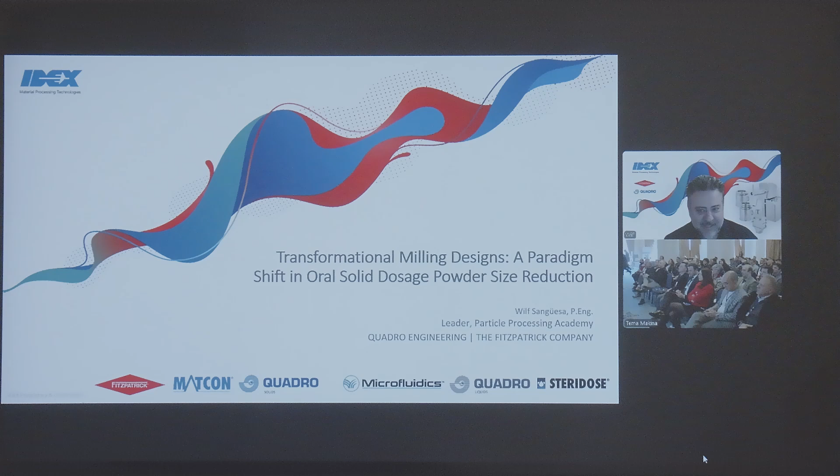But I am glad that we're able to share the next few minutes together and talk a little bit more about some of the things that Quadro and Fitzpatrick have been doing over the last few years. We're going to talk about technology, but before that, a quick introduction of who I am. I've been with Quadro since 2005, so almost 20 years in March.

I know what everybody's thinking - I must have been 14 when I started, because obviously 20 years have gone by. I've had a few roles over the years, mostly in product management, and then more recently toward the application side of the business, supporting customer applications. Right now our new venture is to develop an internal academy to take all the knowledge from those years and train our internal and external partners on our technologies and how we can improve our customers' day-to-day activities.

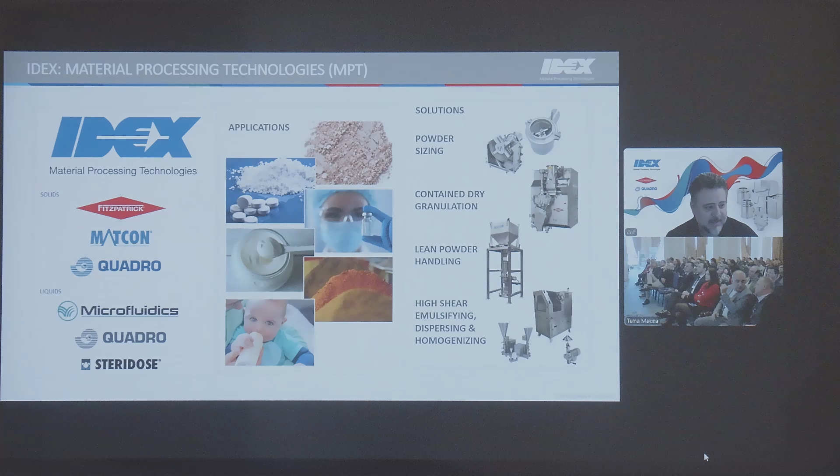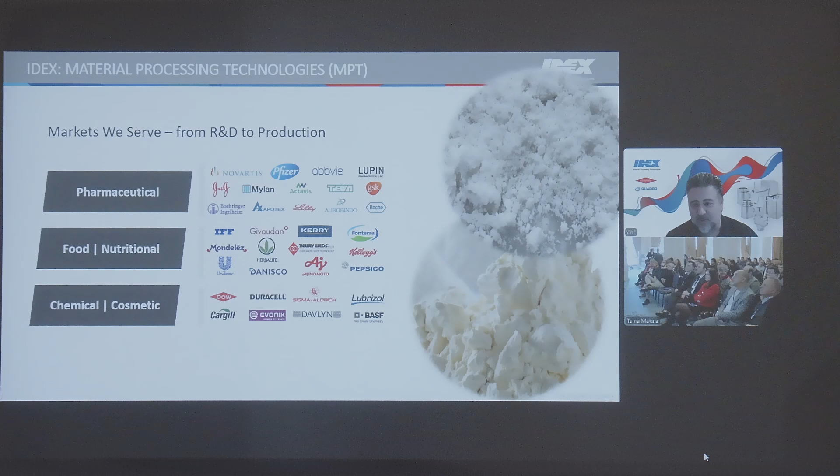Quadro is part of a bigger organization called IDEX Corporation. Within that group, there is a smaller subset of companies that are all related to each other because we manage the same type of applications - Matcon, Fitzpatrick, Microfluidics, and Steridose. We work with just about every customer in the world in the pharmaceutical, food, nutraceutical, chemical, and cosmetic industries.

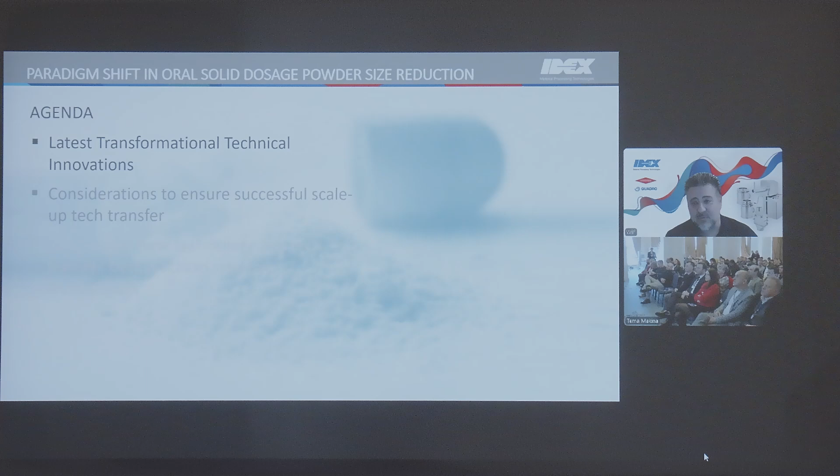So today we're going to talk about some of the things that Quadro and Fitzpatrick have been doing over the last little while - some changes, improvements, and new developments which have been really exciting for us. Since 2016, we've been sequentially introducing new products and improvements to existing products. We'll touch on a few of those this morning, for those who aren't aware of what we've been working on - I think this will be fairly interesting.

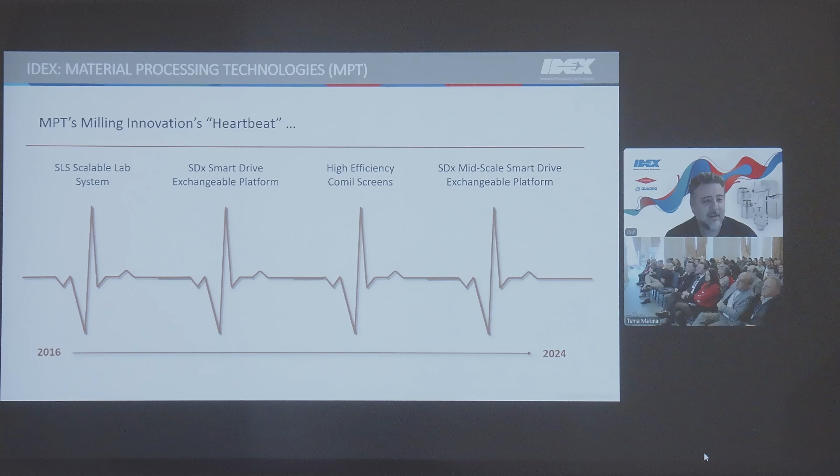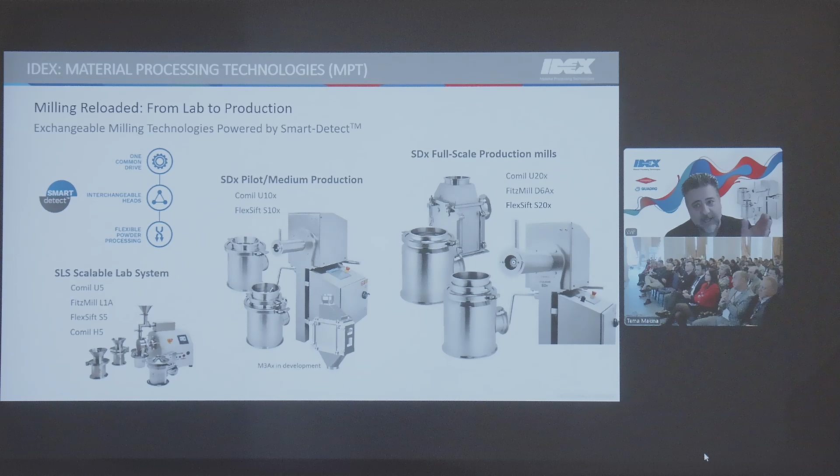We started this interchangeable technology in 2016 with our product lines, and we've been adding to the portfolio by switching all our production machines to that same technology. This is really good because you can take a single drive, and if you need a finer milling application, you put a Fitz mill head on it. If you need a coarser application, you put a Comil head on it. If you need to do security screening, you can put a FlexSift head on it. This goes from the lab all the way up to production scale.

Within that new technology, or this new package, we've made a lot of changes to our actual machines themselves. One thing we used to do is when somebody wanted a machine that was clean-in-place, not wash-in-place - because for us, wash-in-place means you have nozzles that spray inside and get everything wet. It may clean most things out, but clean-in-place means you can clean, you can dry, and then run your next batch without opening the mill. That's what clean-in-place means to us.

So we've made some changes to our clean-in-place technology to make it a lot more versatile and flexible for our customers.

Another big change, and I'll talk in a little bit more detail in the next couple of slides, is we've gone to a greaseless gearbox. We've introduced a complete new design of screens for dry milling. And we've made all our housings, except for the Fitz mill, to be PSR rated, so we've made that sort of standard across both the Comil and the flex sift.

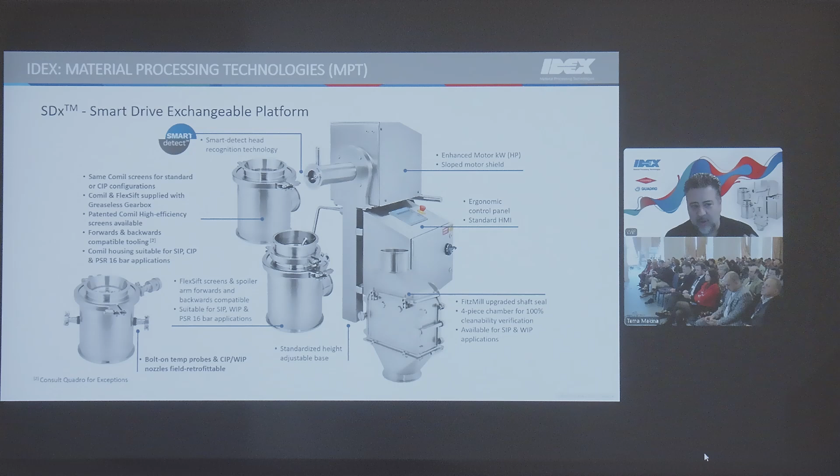So what does that mean as far as, for example, the clean-in-place? I just finished catching the previous presenter talking about OEB bands and OEL levels. With our mills, we have always had the ability to have under 1 microgram per cubic meter OEL level, usually OEB5. It's something our mills can do as standard. We actually have some SMEPAC tests where we are down into the nanograms, like 50, 100 nanograms on average with our mills, but our standard is just under 1 microgram per cubic meter.

And now if you look at the bottom left image, we have transferred those two O-rings to the housing and to the infeed chute. So what this does is, previously, if a customer wanted to have a clean-in-place mill, they had to buy a different head, like a different milling housing. They had to use those special screens, which were not interchangeable with a non-CIP mill. So either you did CIP or not CIP, you couldn't do one mill that could do both.

And the cost of those screens is about 3 times the cost of a standard screen, because there's quite a bit of work to weld that top flange to make sure the screen doesn't warp. It's actually a very, very time-consuming process. So that's one of the things that we did. We decided, okay, let's make our screens so no one has to get any special screens.

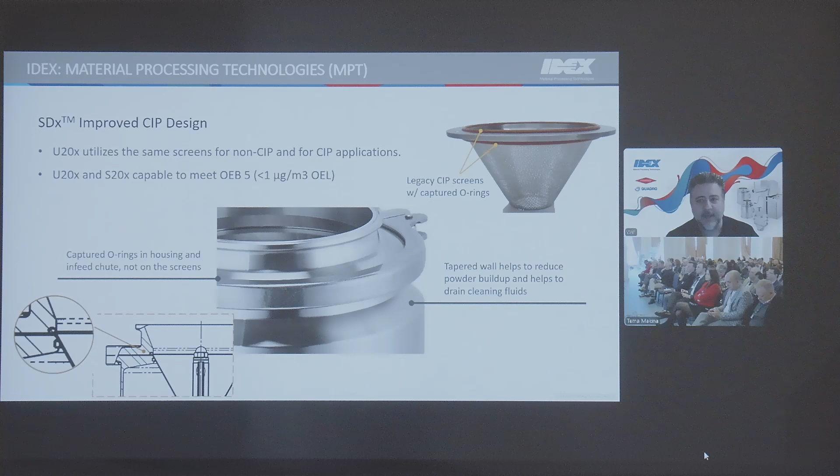That's just one of many things, because the gearbox is a little bit different, the impeller is a little bit different. There are other changes as well, but we've now made all of those standard.

The other big change that we did is we introduced a greaseless gearbox, which means we are running a machine without any grease. Now, all the previous machines have FDA-approved grease, a small amount of grease used inside the gearbox mechanism, but we switched to a greaseless gearbox for a couple of reasons. One, obviously, is to maintain product safety, so if there was an issue with the lip seal that seals the shaft from the mechanical side, we wanted to make sure there was no chance of grease coming into the product.

But by doing that, we also achieved a couple of big improvements. One was the sound, because one of those two gears is a composite gear, which has been used in the aerospace industry for many, many years. So we're adopting technology that's been proven in very harsh environments, and we're now putting it into the actual gearbox, so we've dropped the sound of our machines significantly, about 5 to 10 decibels on average.

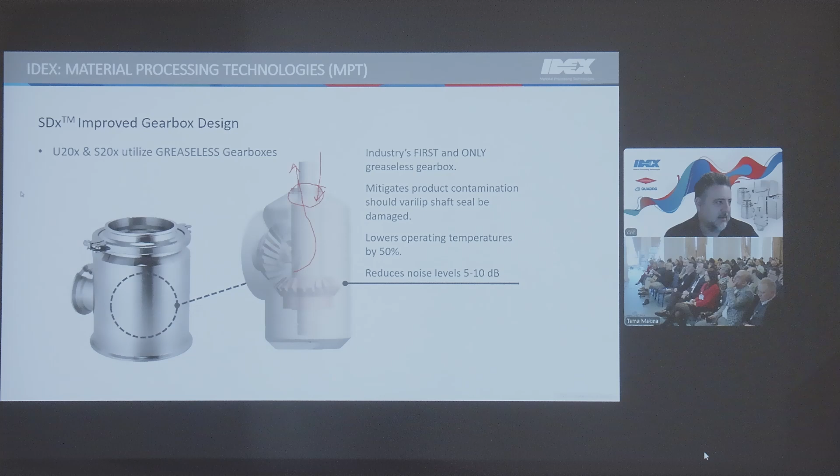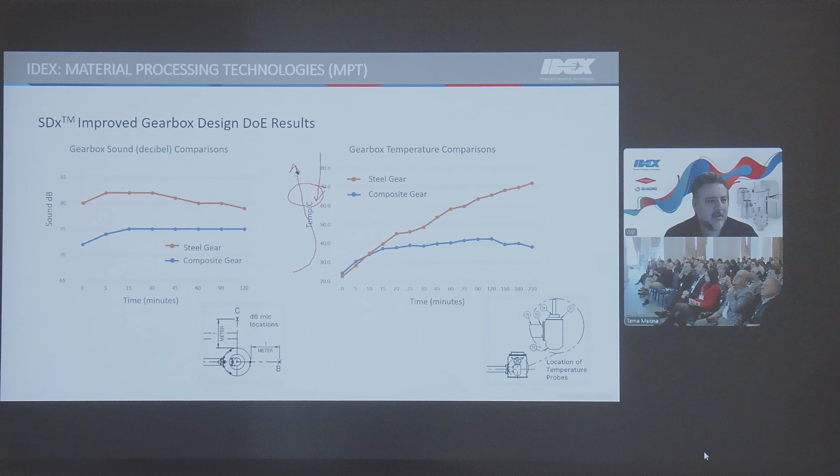We want to make sure we make any... next steps, make sure they don't have any— oh boy, I have to, sorry, I got to delete that. I didn't realize it was going to stay in place. Eraser. Look at that technology.

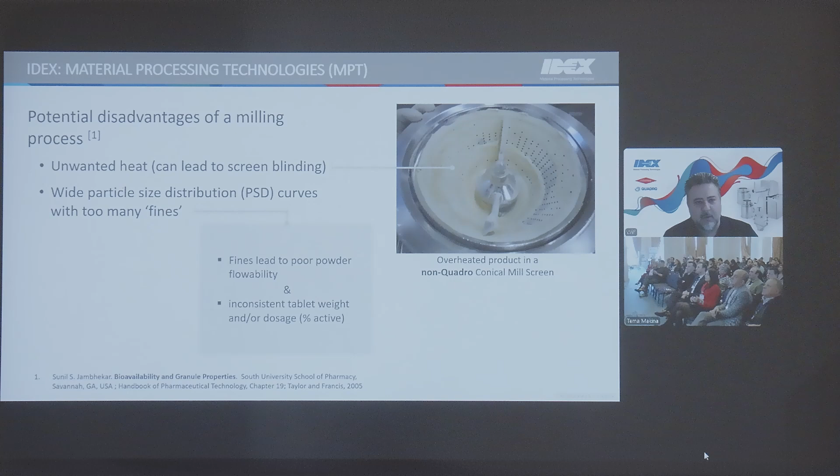Perfect. The other thing we did is we have been talking with customers for a long time, and one of the things we sometimes see in the industry is product blinding screens. Now, this is not our machine, this is another conical mill. We've had customers dealing with products susceptible to temperatures that may tend to blind, and we kept hearing from customers asking if anything could be done to prevent powder from sticking to the walls and actually blinding screens.

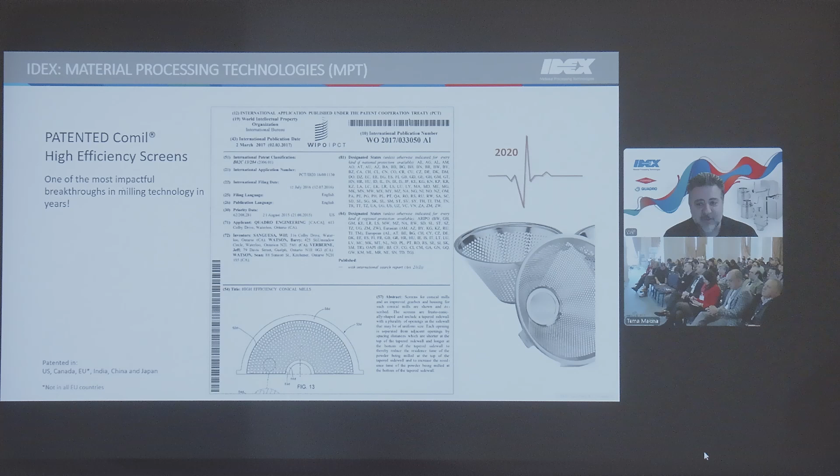So what we did is we patented a different design screen. These screens are compatible with older machines as well, so if you have an older mill, U5, U10, or U20, you could use the screens. But we have what we call the high efficiency screens. We patented this back in 2020, and I had no idea how long it takes to get a patent—it was like a 2 or 3 year process. Very time consuming.

But the main things we were able to achieve with high efficiency screens: we were able to reduce the temperature generated while milling. We call them high efficiency because they allow powders to flow through faster. The faster a powder flows through the mill, the less time it stays inside, so the less time it generates heat. By getting powder out faster, we drop the heat.

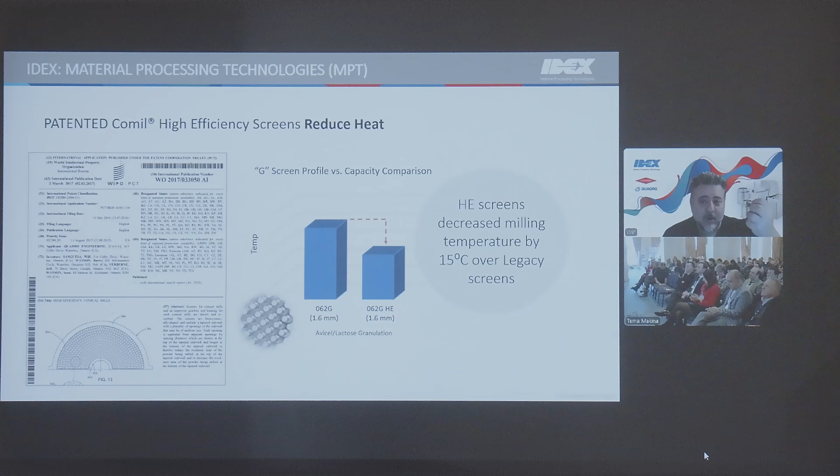And by getting powder out faster of the mill, we actually increase the capacity. The average capacity increase of the high efficiency screens is about 50% over the legacy and previous screens. For some screens as high as 60, even 65%, but the average between our screens is about 50%.

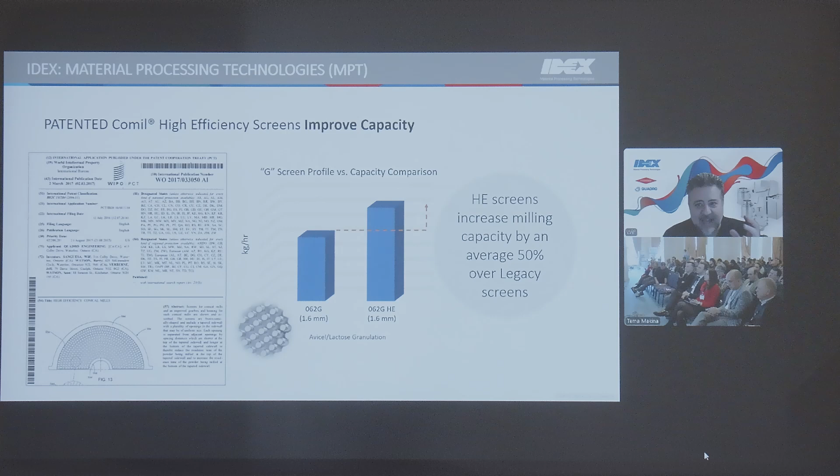So how does it work? I'll try to explain the patent—you can find it on the internet, download it, read it, but if you read a patent it's really hard to follow what it says. So I'll try to explain what we're doing.

I took a photograph of our high efficiency screen, then close-ups of the holes near the bottom and the holes near the top. What we've done is changed the number of holes on the screen—they get closer to each other the closer we get to the top of the screen. So as the screen goes from top to bottom, we have a gradual increase in open area between the bottom and the top of the screen.

We did this because the screens are angled, with a 60-degree angle. As the powder and the impeller rotate, the powder tends to travel toward the top of the screen and then goes out. So most of the milling happens in the top third of the screen.

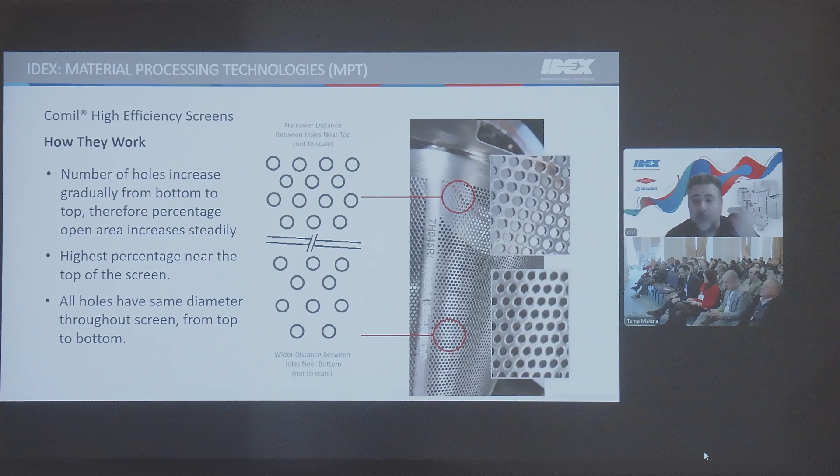By providing a higher percentage of open area near the top, we increased the ability for powder to go through the screen faster. We haven't changed the hole diameter, though—that was key. So if you had a 2mm screen, it's still a 2mm hole screen. Every single hole is still the same diameter; we just added more holes at the top of the screen. That's what the high efficiency screens do.

We ran some CFD analysis to see what that actually meant before doing too much more work on them. Here are two images, a legacy screen in the middle and a high efficiency screen on the right, showing the airflow. Darker blue shows slower velocity, and as you get to green, yellow, and red, it shows higher velocity generated inside. The one on the right generated a lot more velocity, meaning a lot more product would be able to get through.

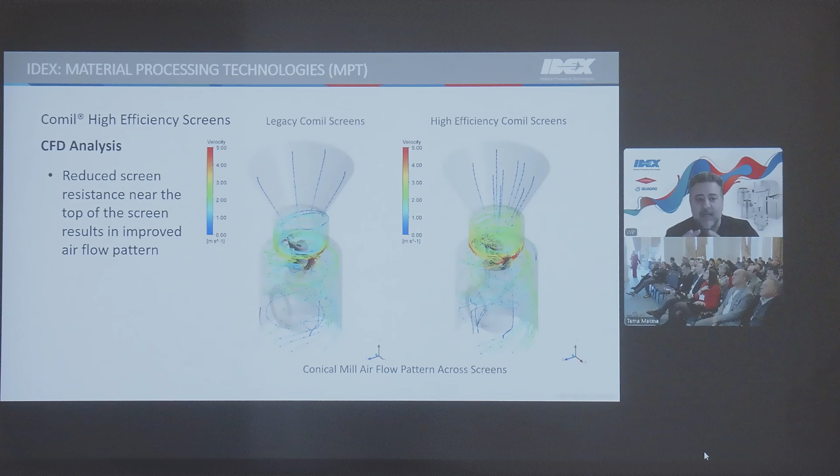So we did this airflow pattern, and then we also looked at the mass transfer, which is basically the equivalent of capacity. It has the same scale—the darker it is, the slower the velocity in meters per second, and as you get close to red, the faster it is. You can see where the milling area is.

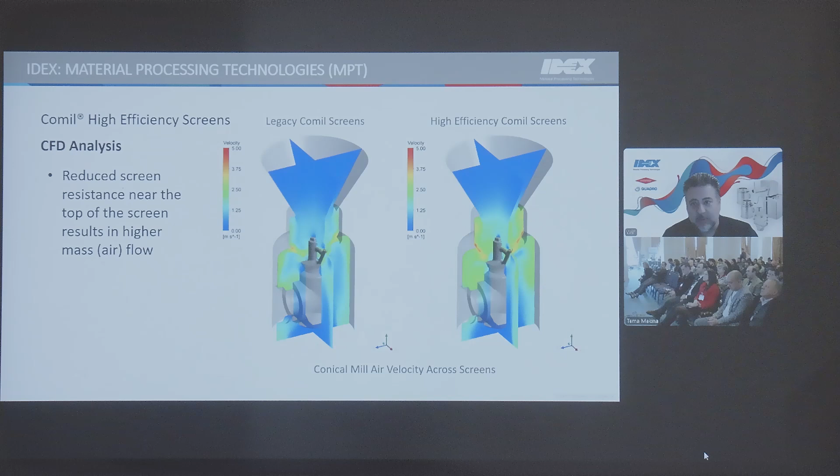There's a picture of the impeller near the middle. You can see the blue color, meaning it's slower, with a little bit of green on the side and edges, and most of it slows down. Whereas on the high efficiency screens, it's mostly green in the middle, and we even have some red, meaning it's going very, very fast. So the mass transfer analysis showed the high efficiency screens would generate higher throughput, higher capacity.

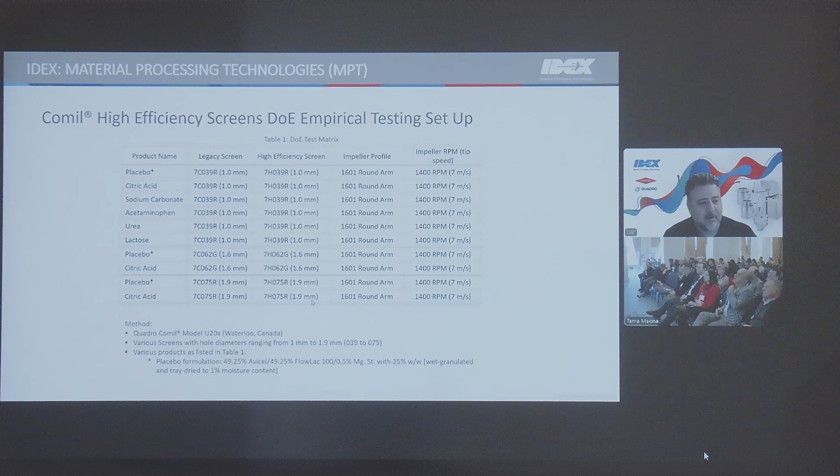We then ran a number of tests—I didn't put every single one on this chart, but wanted to show some of what we tested. We did placebos, citric acid, acetaminophen, some products. We kept the impeller profile the same, same type, same speed, so we're not changing any variables other than going from a legacy screen to a high efficiency screen. The part number is identical except for the letter H, which stands for high efficiency, but the rest of the numbers still tell us 1 millimeter, 1.6 millimeter, 1.9 millimeter, because we did not change the actual diameter of the holes.

When we started plotting the data, this is where we came up with this 50% improvement. Some screens and products behave a little differently, but on average it's about a 50% improvement in capacity on the 1 millimeter screen, along with almost a 30% drop in temperature rise.

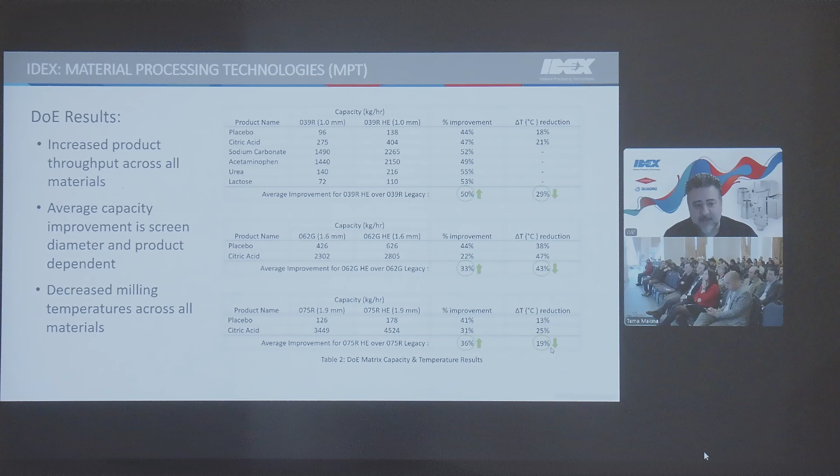We did some things with other screen sizes. On the 1.6 millimeter screen, we had a 33% increase in capacity with a 43% decrease in temperature. And on the 1.9 millimeter screen, a 36% increase in capacity and a 19% decrease in temperature.

We did a whole bunch of other tests as well. The one item customers always want to make sure of when you change technologies is that you're not changing what you're trying to do. So we wanted to make sure the particle size distributions were not affected by changing how powder flows through the screen.

Here we have a couple of examples with overlapping curves showing the legacy screen and the high efficiency screen—they're basically identical. In the left-hand corner, I have an excerpt from the FDA that talks about the usual upper and lower limits that are acceptable, so you know that if your powder is within that range, you're going to get good tablets.

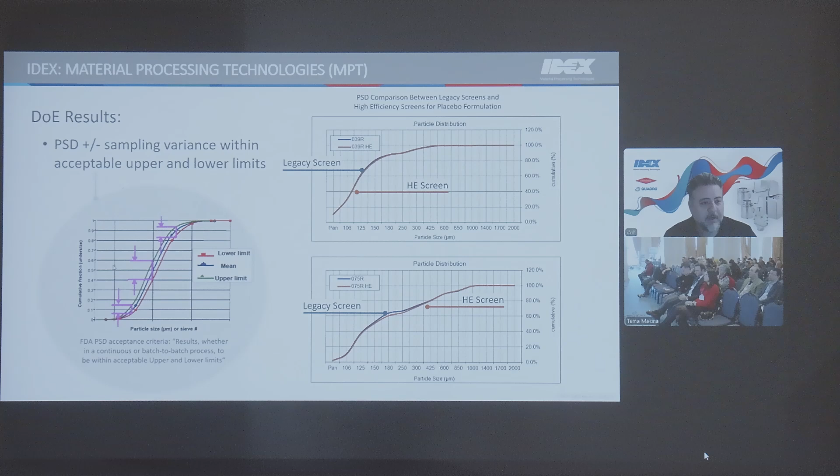So you have validated your process that says, as long as my distribution is within this upper and lower limit, I know that when it goes to the tablet press, I will be able to make good tablets. Again, we did not want to change particle size distributions, but we wanted to provide customers with an option for their product, especially if it's heat sensitive.

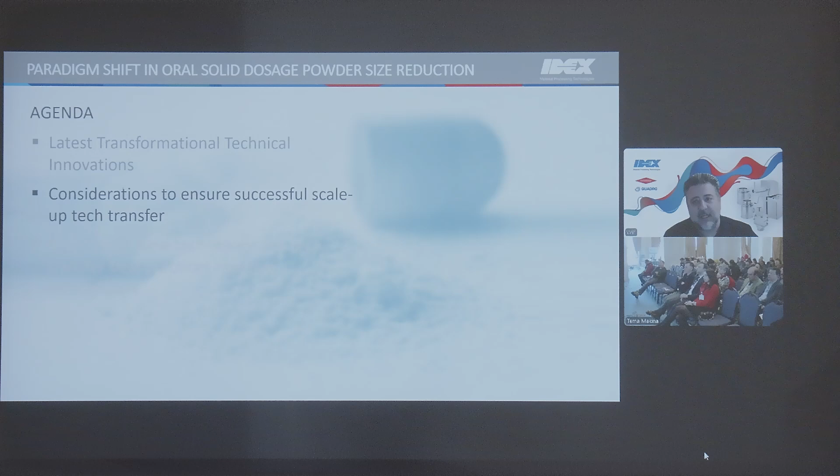The next section of our morning is going to talk about a bit of what we just discussed with the high efficiency screens, but from more of an overall perspective of our technology, and how you ensure that whatever you do at the lab scale with a lab machine can be scaled up to production.

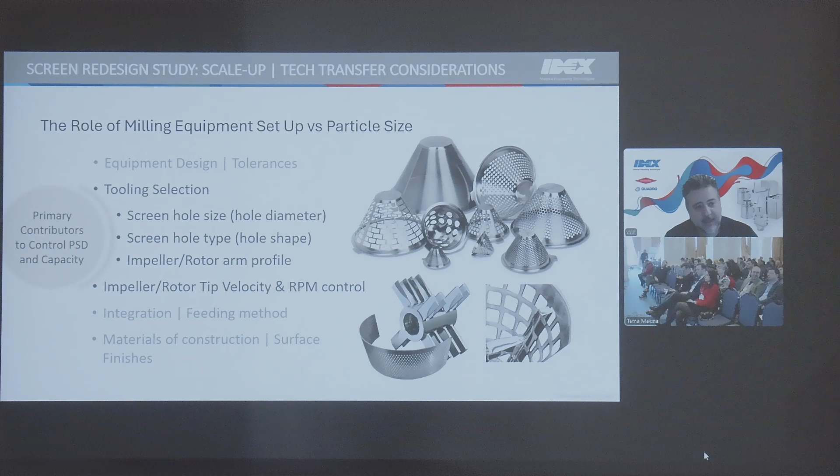There are different parameters that affect your milling. The design and the tolerances are something we as a company have, and that's one of our differentiated features versus other technologies. How you integrate it, how you feed it, the materials of construction, surface finish—all those things affect particle size. But the things that most customers have more control over are the tooling selection, which we call the screens and the impellers, and the RPM we're using—all of these affect particle size. So we have an example here of a wet granulation.

Whenever you have a wet granulation product, just before you do the drying, if you put it through a mill—one of the big steps we always recommend to customers, and there are papers on this, I just did a blog on this on LinkedIn—there's lots of literature on the benefits of putting a mill after a high shear mixer.

So when you have that, and you put it into your fluid bed dryer, if those lumps are not removed, you will have a product that is either over dried. If you're drying for say 30 or 40 minutes, and you have different size granules going into the dryer, the smaller ones will be super dry and the big ones may still have a soft center. Or if you ensure the soft center is gone, then the smaller ones will be even harder because they've been dried longer.

There are all kinds of papers that show if you do that, you'll actually generate more fines during the dry milling step.

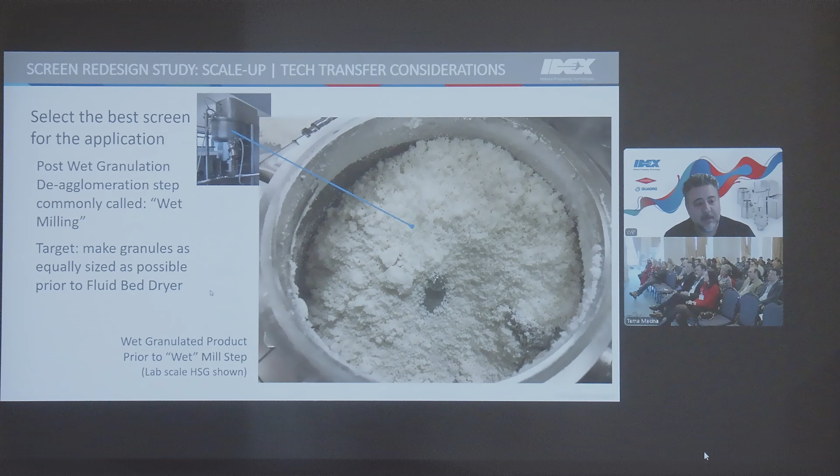So the very first thing we do when somebody's using a high shear mixer is recommend they use square or slotted screens with a square bar impeller. That is the standard. Within these two types of screens, we have different sizes—as small as 6.4 millimeters all the way up to 25 millimeters. The size of the hole really depends on the characteristics of the wet granulation.

The heavier, more dense granulation may require a slightly bigger hole than the drier ones. For a drier one, you may be able to use a 9.5 millimeter hole screen, because the goal isn't to make small particles, but to make every particle going into the fluid bed dryer as equally sized as possible. That's a big difference between dry milling and wet milling—here we're not trying to get small, we're just trying to get everything more evenly distributed before it goes into the dryer, so you have a good dry product.

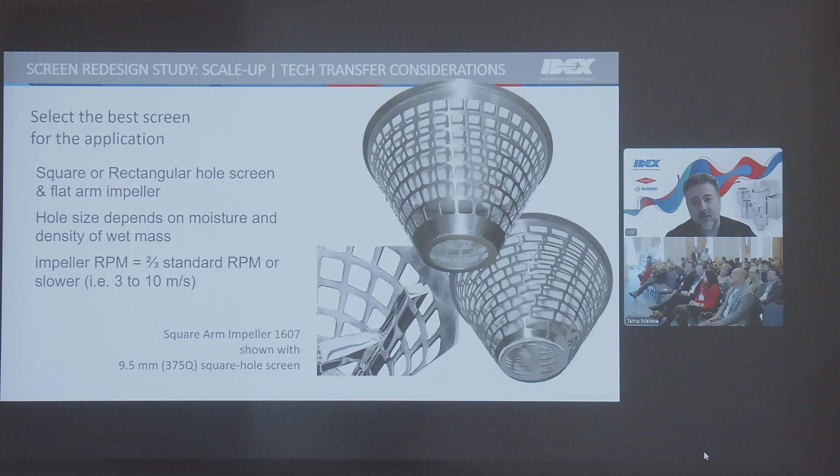Then the product goes into the dryer and gets dried up, and now there are two primary places where you would do any milling. Again, the goal of milling is to get a really good particle size distribution—usually 20 to 200 mesh, or 75 to 800 micron, is the industry standard. There are lots of papers published on the benefits of that range, because you don't want 100% of your product to be, say, 300 micron, because then you wouldn't be able to make tablets.

You do need to have a distribution of finer and coarser particles, so when the tablet press is pressing that powder into a tablet, the smaller, finer product goes in between the larger one. The larger one can then be shaped into a tablet, and then you have a robust tablet. So you do need a distribution, but you also don't want a very wide distribution with a lot of fine product and a lot of coarser product. Then you probably wouldn't be able to make a good tablet. So it's a fine line between too much and too tight.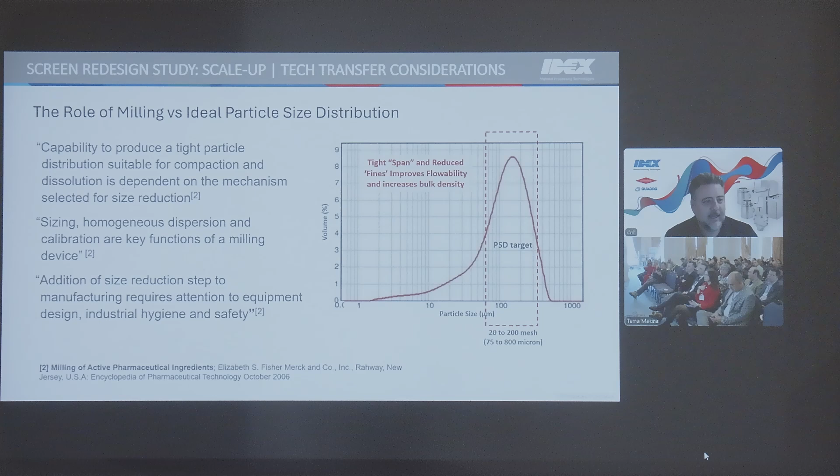What happens during actual milling steps is you can control the particle size or distribution by the hole size. The bigger the hole, the coarser the particle size distribution is, and the smaller the hole, the smaller the particle size. But interestingly, as you go to a smaller hole size, you also tend to make a wider distribution. And as you go smaller, the open area percentage drops a little, meaning there's a bit more steel between every hole, which helps generate finer powders.

So this is one of the things that diameter will do to your particle size. Here we're showing the same product being milled with a smaller screen and a larger screen, and that evidently makes a difference. What I always found interesting is when you have the same diameter hole size but a different profile. The two main types of screens used in the industry are either a round hole with nothing special, or a rasp or grater screen that looks like a cheese grater. Those are the two main types of screens used in dry milling, and there is a significant improvement when it comes to particle size distribution.

When you look at those two curves, they're both done with the same size screen, a 2 millimeter round hole screen for both, but one is a grater on top and one is round on the bottom. If you can imagine, as your powder comes into the mill and the impeller is rotating, the one with the grater is pulling powder out much, much faster. So the faster the powder can come out of the screen, the tighter the distribution is, and it's going to be coarser because you're not generating as many fines.

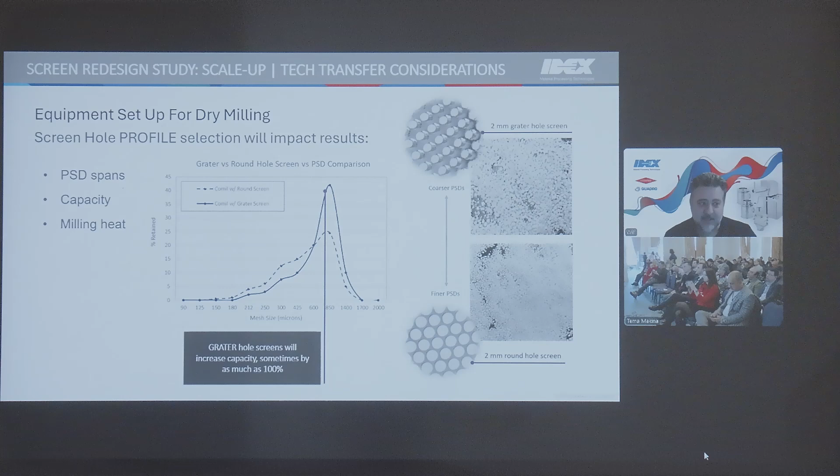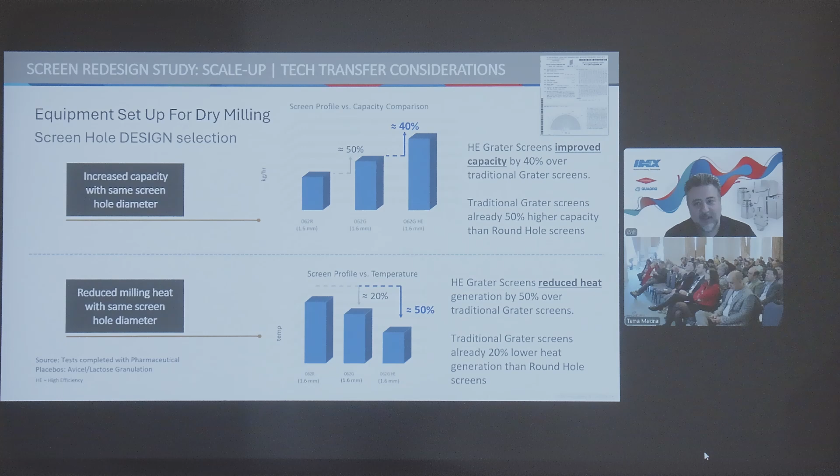The additional big plus, as we talked about with high efficiency screens, is that we can take what was really good between a grater screen and a round hole screen and now go grater high efficiency. We actually increase that capacity even more and reduce the heat even more. Here's an example of the exact same screen hole size: 1.6 millimeter round, 1.6 millimeter grater, 1.6 millimeter grater high efficiency. You can see it went 50%, 40%, as you move through the different types of screen, always with the same 1.6 diameter hole. On the bottom, it's the exact same steps - round, grater, high efficiency - and then your reduction of heat, 20%, 50%. So there are additional advantages on the high efficiency screens, even over our standard screens.

The other item that also makes a difference on your particle size distribution is the impeller profile, the shape of the impeller that's actually doing all the milling, hitting the powder and pushing it through the screen.

We have many different kinds, but the two primary ones are a square and a round. Those would be the ones that get used for the majority of the milling applications. And again, the impellers will have an impact on your particle size distribution.

On this one here, the round arm actually is a bit more efficient in getting powder out. The round acts almost like a press as it's pushing powder through that screen. By pushing it through the screen faster, we get a coarser distribution and less heat. Whereas the square arm impeller, it sort of hits the powder more like more impact, as opposed to more grinding.

So the impact will hit the powder, some goes past the screen, some stays inside the screen and goes over a little bit longer before it actually comes out. So the longer you keep powder inside, the more fines you're going to generate. There isn't a huge difference, but it could be a slight shift. That's what you need in order to get your particle size perfect for your tableting needs.

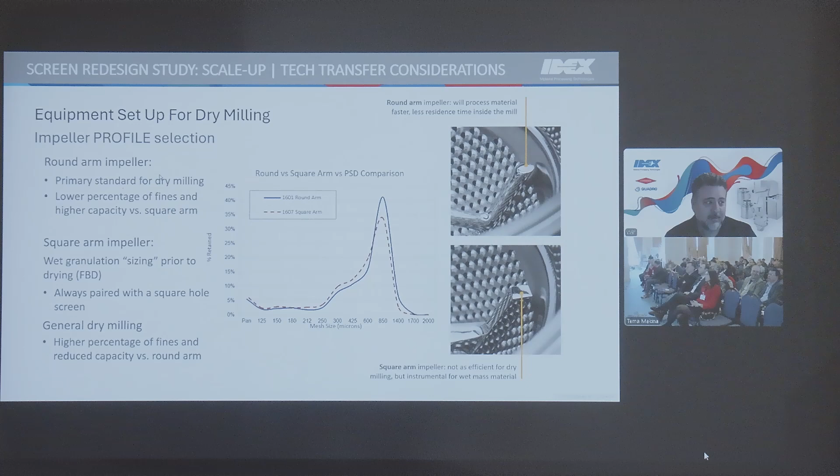The last parameter that gets sometimes overlooked is the RPM, the speed at which you're running the mills. Here we have an example of the same product run at 7 meters a second tip, that's the velocity of the impeller. Then we double it to 14, and then we double it again to 28.

The 7.1 and the 14.2 are the two top curves, so they're very close to each other. And then the 28 meters a second, we're putting so much more energy, we're now generating a lot more fines. So the 7 is this one, the 14 is this one, and the 28 is this guy here.

The faster you're running your RPM, obviously the more energy you're putting in, the finer the particle size distribution is going to be. The reason why I think it's interesting to look at these two curves is at 7 meters a second and at 14 meters a second, you're getting very similar particle size distributions. But the next item that becomes critical is...

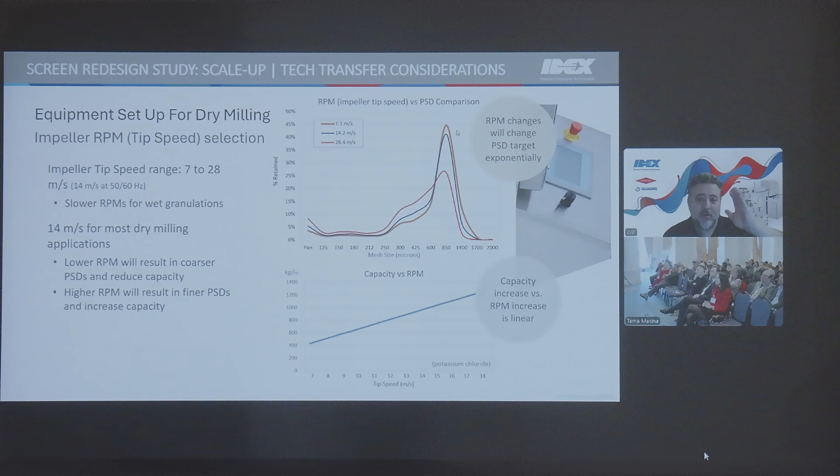So there's a fine line between your tip speed giving you a really good distribution of powder and your capacity that you need to do for your production scale. So if you imagine you're doing trials in the lab and you say, okay, I like what I'm getting at 7 meters a second, that is really nice curve. But at 7 meters a second, you're getting a much lower capacity.

This example is potassium chloride that mills pretty easily. You may say, okay, I'm going to get 50 kilos an hour in my lab at 7 meters a second. Now I need to go to production. In order to go to production, I have to do 200 kilos an hour. Now I have to jump like 2 machines in size to get to that production capacity.

Whereas if you were to run at 14 meters a second, you have almost a very, very similar distribution. But now from 7 to 14, you've gone, in this example, from 400 to 1,000 kilos an hour. So by going a little bit faster, you're still getting your particle size distribution, but you're getting a much higher capacity. So when it comes time to scale up to production, you don't have to jump so many machines to get your production scale.

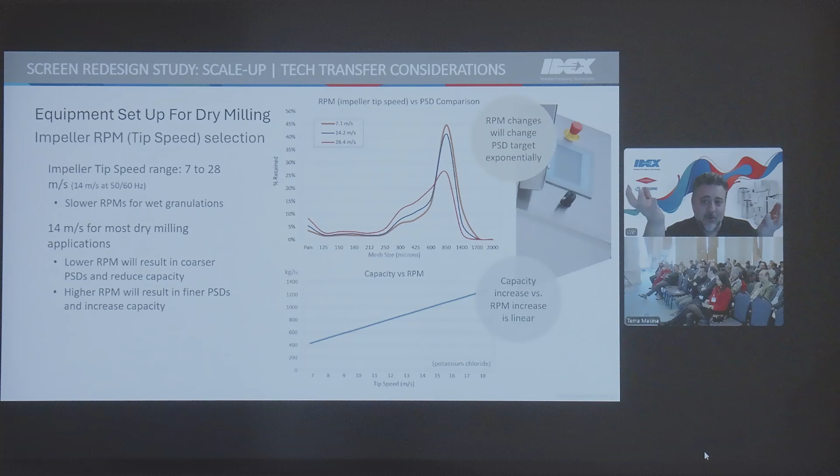So there's a very fine line between your setup and what you have to do when you start scaling up to production. And as I also heard the previous colleague talk, the proof of concept testing is critical on all this, and we encourage our customers to talk to our partners, and then our partners can talk to us, or we can talk to our customers to explain and help them how to optimize their testing at the lab scale so that it will optimize your actual requirements in a production machine.

So again, those two things are very important with each other. And what you have to do as you go from lab scale to production is make sure you're not changing anything, that you keep the same parameters.

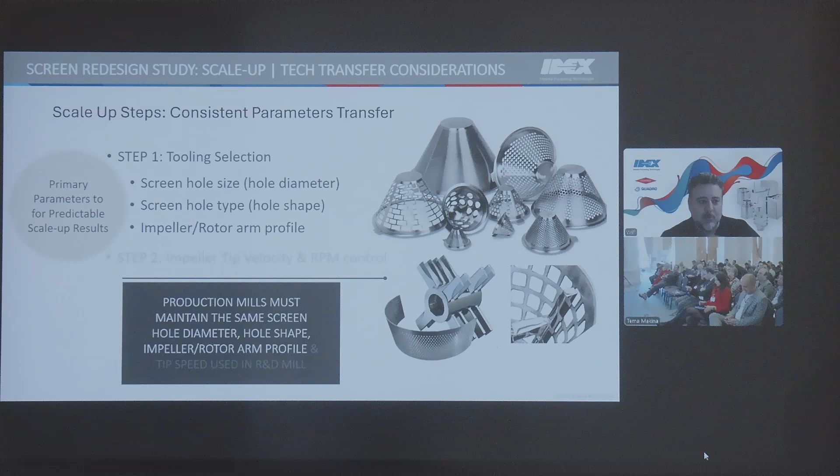So you've done your trials at the lab scale. You've determined what is the best hole diameter, what is the best screen type, round hole versus grater, and what is your best impeller profile. Now you have to make sure those three are maintained as you go to the next model, and the next model. You have to make sure those things are constant, because that's what the powder is going to see when it gets milled, whether in the lab or in production. It's still going to get that same energy, that same action, that same milling transferred from a small to a larger machine. So that's one key thing.

The second step is to make sure we maintain the tip velocity. We can provide the formulas, but they're very easy. The goal is that if you're running a test in the lab, here's an example at 1.6 times what we call standard speed. You multiply that 1.6 times any of the other RPMs in order to get the same tip speed at the end. So as the machines get bigger, the impeller gets larger, the RPM drops, but the velocity of the tip of the impeller stays the same. That's our goal. We're transferring the same amount of energy to the milling process, no matter if it's a small mill or a large mill, because the tip velocity, which is what impacts the powder, stays constant.

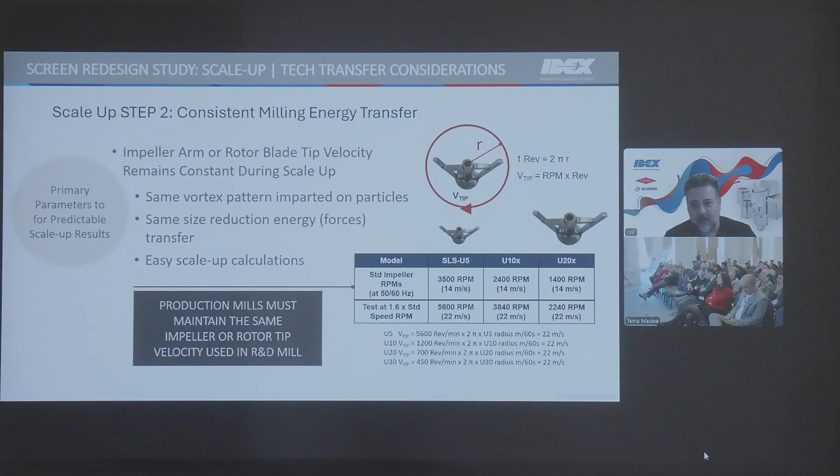And again, if you have any questions on scale up, let Tema know, let us know, and we'll easily do the calculations for you if you need to. But it's a very, very easy scale up process.

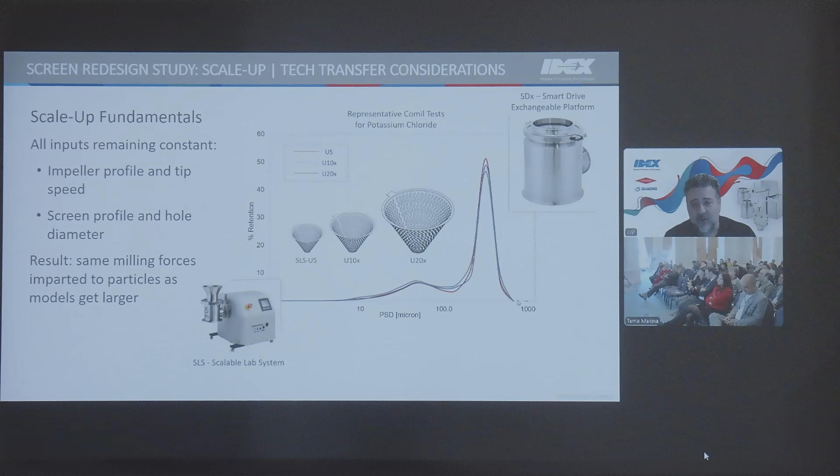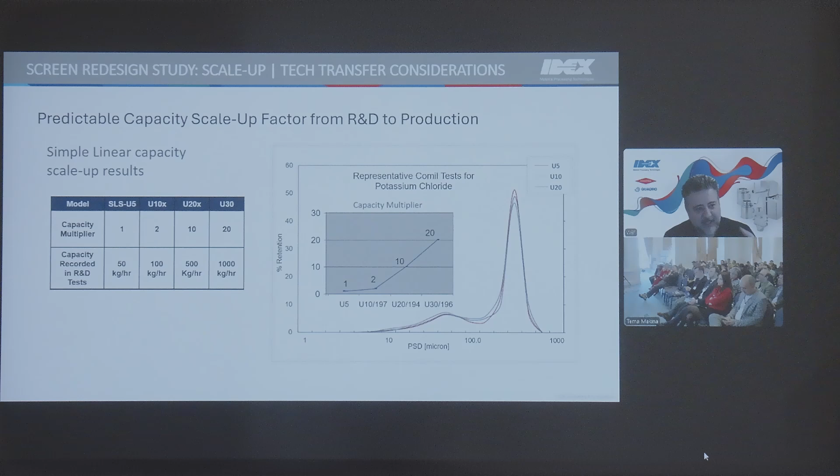And then we have a very easy scale-up process when it comes to which machine to select. The math is fairly easy to do. So these are the things that are important when it comes to our milling.

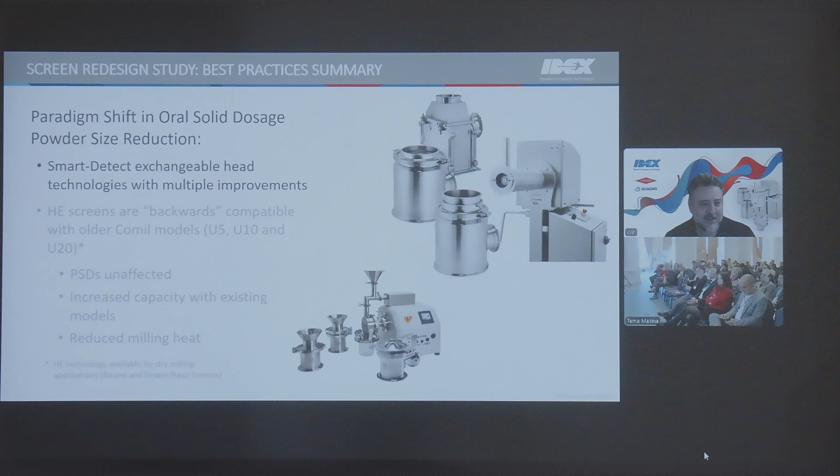So just to recap, we've been very busy, especially, it was interesting, because during the pandemic we launched three things. Maybe we had more time to actually concentrate on development, since we weren't traveling as much. So we've done the introduction of our smart drive exchangeable units from lab all the way to production.

And then the other big thing is the high efficiency screens, which allow us to provide customers with an alternative result without changing anything. So if you're validated on a 2mm screen or a 1mm screen, but now you're finding your product tends to overheat, or you'd like increased capacity but don't have the ability to go to a larger model, depending on the capacity increase, the high efficiency screens allow us to provide that without changing anything. So you can stay validated, your particle size not really going to change, but you have benefits associated with the high efficiency screens.

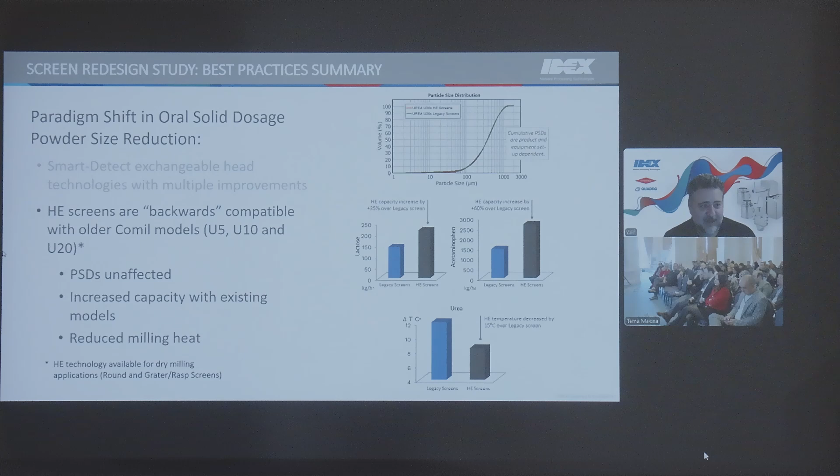I don't know if I went too fast or not. I think I'm on the half hour, I was trying to get it within the half hour. I hope we've given you a small glimpse of some of the things we've been doing over the last few years. I don't know if you have any questions, I'm happy to answer any you may have.